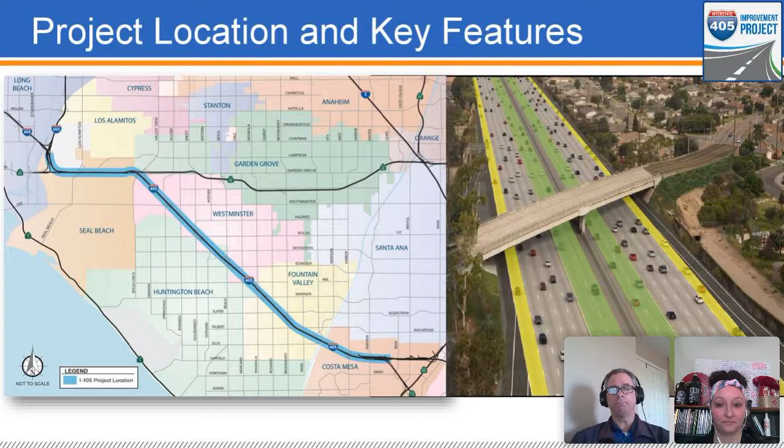On this next slide, you can see some of the major features of the project. We are replacing 18 bridges as part of this work, widening 4 others, and constructing a new express lanes connector between SR 73 and I-405. We're also building more than 150 walls throughout the project area, and there will be new bike lanes and sidewalks on all of the new bridges. The overall cost of the project is approximately $1.9 billion.

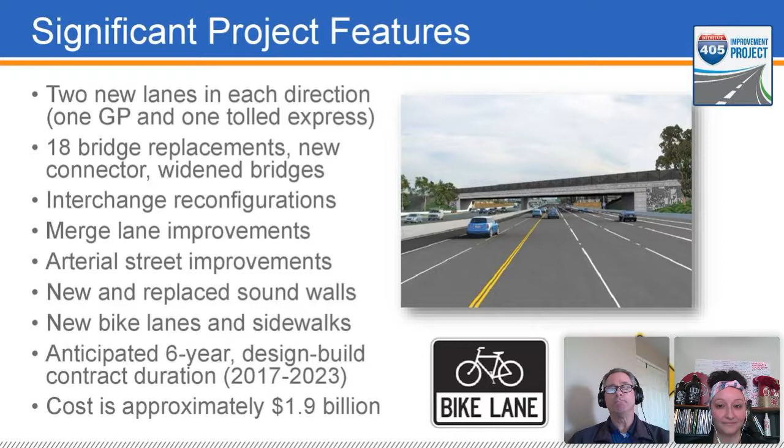Next, Nikki is going to provide a brief update on construction activities. Thank you. We're very excited to share that the project hit a major milestone a few months ago—we passed the 50% complete mark, and the next several slides show the construction progress.

More than half of the walls are under construction or completed. These two photos reflect the aesthetic patterns that are being placed on the retaining walls and sound walls, and most of the walls on the project will be completed by the end of this year.

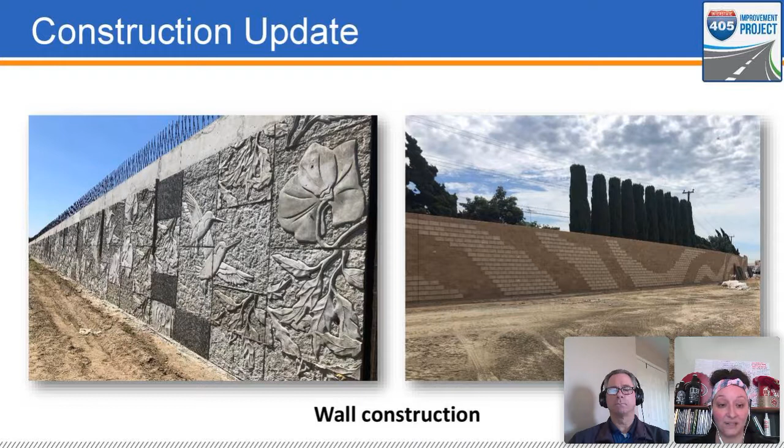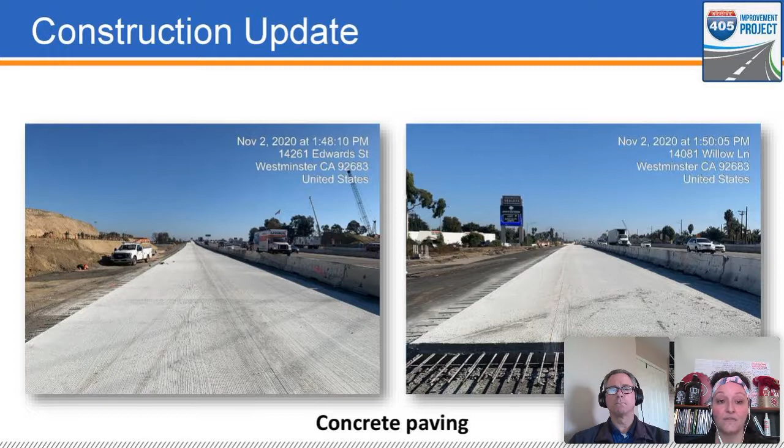This slide shows some of the concrete paving being placed to accommodate the wider freeway. Significant paving will take place this year for the freeway widening and where we are realigning on and off ramps. Here you can see the progress being made on widening the freeway over the Santa Ana River. Moon Park is in the background in the top left part of the photo.

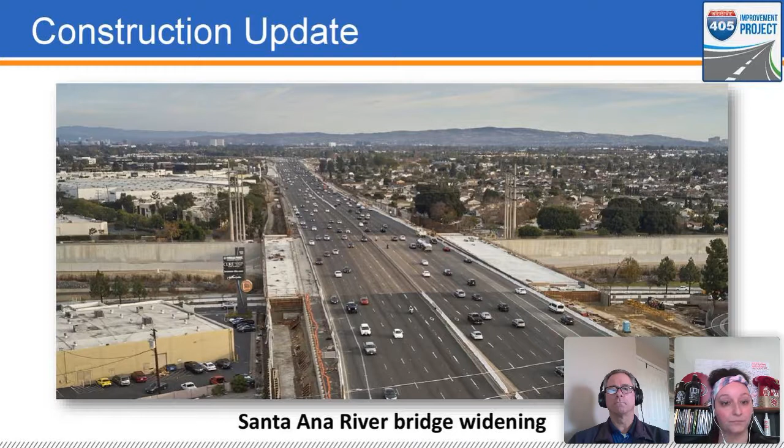On this slide, the photo on the left shows the new northbound on-ramp from Hyland Avenue and South Coast being constructed. The photo on the right shows some of the false work installed for the freeway bridge being widened over Harbor Boulevard.

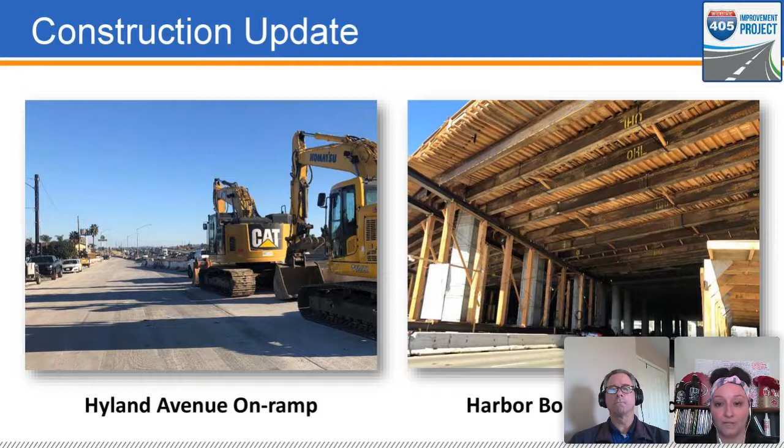Looking ahead further into this year, it will continue to be a busy time for bridges, walls, and pavement construction. This slide shows some of the upcoming bridge milestones that we anticipate this year.

Crews began demolishing the second half of the Westminster Bridge last weekend, and that will continue this weekend as well. The first half of the Fairview Bridge is anticipated to open this month, and Chris will talk a little bit more about that shortly. The Talbert Bridge is anticipated to fully open this spring, and that will allow us to start reconstruction of the Ward Bridge shortly after.

The first half of the Bolsa Bridge is anticipated to open early this summer. The Magnolia Bridge is anticipated to be the first two-stage bridge that will open fully to traffic this summer. Opening that bridge, Magnolia, allows us to start the reconstruction of the Warner Bridge this summer as well.

Several other bridges are anticipated to be completed in the second half of this year, including the Heil Pedestrian Bridge, the Edwards, Bolsa Chica, and Goldenwest bridges.

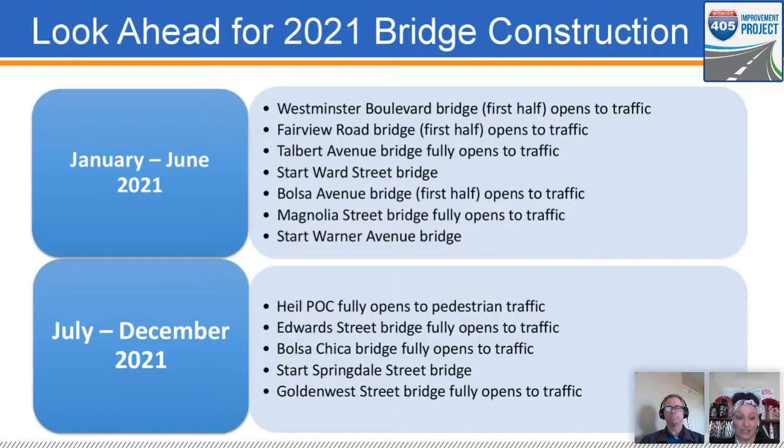Next, Chris is going to share the latest on the Fairview Bridge and what we expect in the coming months.

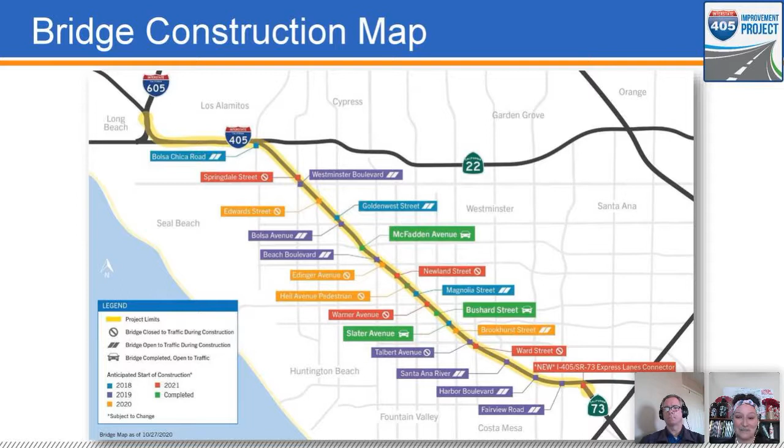As Nikki mentioned earlier, the contractor is getting ready to switch traffic onto the first half of the new Fairview Bridge. The traffic switch activities began last weekend with crews doing some preliminary striping and K-rail placement.

This prep work will continue as crews work to tie in the existing roadway and ramps with the new bridge. So that's what you're seeing going on right now.

Then on Thursday, February 11th at 6:30 p.m., Fairview Road between McCormick Lane and South Coast Drive, as well as all the ramps, will be closed to allow for final placement of K-rail and restriping, among some other final activities.

Then on Friday morning, February 12th at 6:30 a.m., traffic will be driving on the new bridge. That's the current plan.

We always put a disclaimer out there that says unforeseen site conditions or weather might impact that, but we're on track at this point to put traffic onto the new bridge by the morning of Friday, February 12th.

On that new bridge, there will continue to be 2 lanes in each direction. That'll be the case for the rest of construction, though there will be intermittent lane reductions at off-peak hours for some activities, as there has been with the current construction.

So as I mentioned, the next phase of work is expected to take about 16 months. We expect the bridge to be fully open by mid-2022.

One of the questions we've gotten, because the first time we had a meeting about this bridge, we anticipated it taking 24 months, is why is it taking so long? As we've learned over the course of construction, there are a lot of factors that affect it, including unforeseen site conditions, the availability of crews, subcontractors, or equipment, activities taking more time than originally anticipated, and weather impacts. Some of these factors were at play in Fairview's case.

Specifically, as I mentioned earlier, the work area on the freeway at Fairview is extremely tight. Those space constraints required extensive temporary shoring to safely construct the new sides of the bridge, the abutments — the concrete structures that support each side of that horizontal superstructure.

Also, additional shoring was required for the center columns of the bridge. That additional shoring took more time, needed to be designed properly, took more time to install, and that slowed progress on the bridge work.

Additionally, the bridge superstructure is composed of precast girders. You may have been out there and watched when they installed those girders over the course of several nights last year, I think it was in fall. Those required extra attention and testing to ensure they met Caltrans standards, which added some delay to the bridge construction.

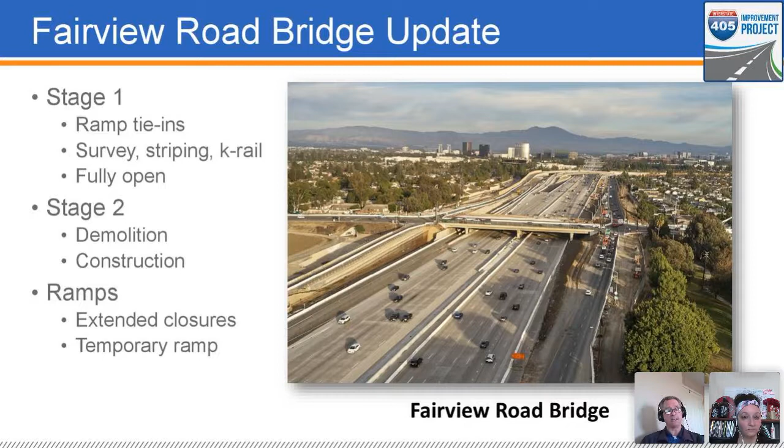And while our team usually likes in-person discussions, which we had for the first round of Fairview work for major updates like this, we will be continuing to conduct these and all other meetings virtually for the foreseeable future.